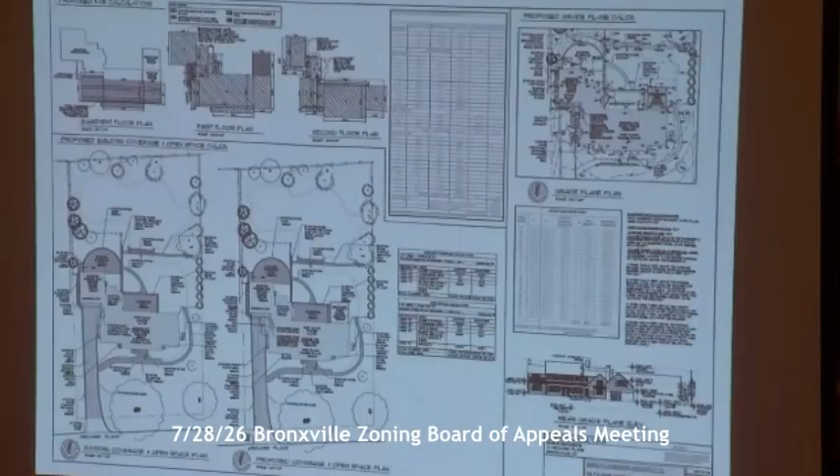the building inspector of the Village of Bronxville dated June 1st, 2026, and a request for area variances at 12 Orchard Place related to a proposed 1-story addition at the east side yard and a proposed 1-story addition at the west side yard, as well as the expansion of the existing rear yard patio with seat wall and expansion of the existing front yard window well over at this location here.

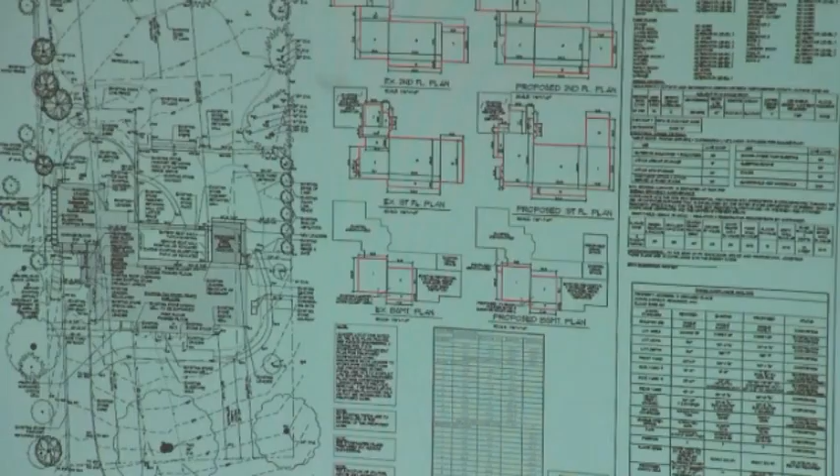The property is also known and designated on the tax assessment map of the Village of Bronxville as Section 16, Block 3, and Lot 25. The property consists of 21,999.7 square feet, 0.5050 acres, and is located on the south side of Orchard Place, adjacent to the intersection with Summit Avenue. It is in the Residence AAA district of the village and is improved with a single-family residence, which is home to owners Kendall and Jack Raybun.

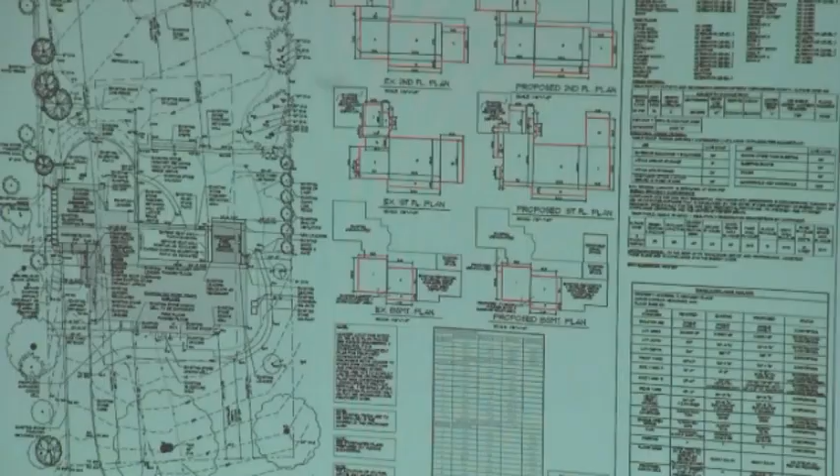Our project proposes in part a 1-story addition at the east side yard that provides a first-floor mudroom off the existing driveway, and a 1-story addition at the west side yard that provides a first-floor bedroom. The new work includes the expansion of the existing rear yard bluestone patio and seat wall, in the area of the proposed bedroom addition, and the repair of the driveway in the area of the mudroom addition, as well as a partial basement renovation, which includes the expansion of an existing window well to provide emergency egress.

So here's that window well here. These proposed improvements require both east and west side yard area variances, as well as a maximum building coverage area variance, as the existing non-conforming status for both of these standards are increased.

Regarding the bedroom addition at the west side yard, the minimum side yard setback is 25 feet. The existing side yard setback is 20 feet, and the proposed side yard to the addition is 20 feet, 3.5 inches. The owners seek an area variance for 4 foot, 8.5 inches.

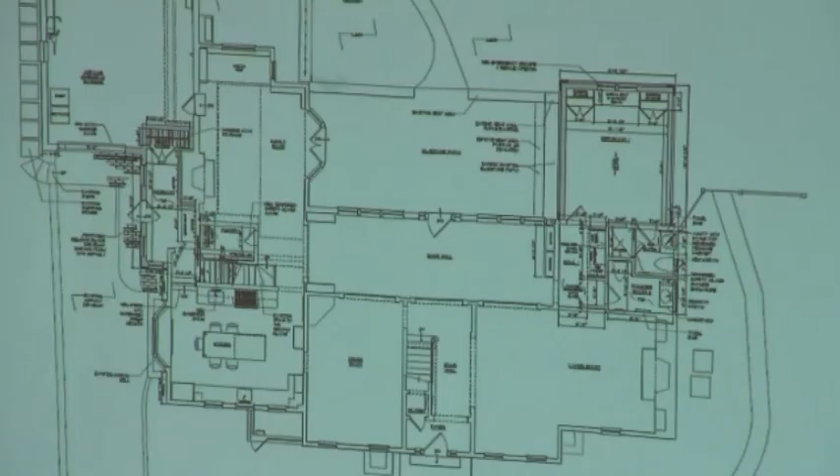Additional work includes the renovation of the first floor to include a new bath, powder room, hall, and pantry closet. At the second floor, a bathroom is renovated and an existing hall bath becomes a laundry room. The owners are working with Hudson Engineering to assist with stormwater plans to address the proposed improvements.

I respectfully request that the board, in making their determination, consider the benefits to the owners as weighed against the detriment to the health, safety, and welfare of the neighborhood and community if the variances are granted.

As to the requested variances, we respectfully submit the following. Number one, the grant of the variances will not produce an undesirable change in the character of the neighborhood, nor a detrimental effect on neighboring properties.

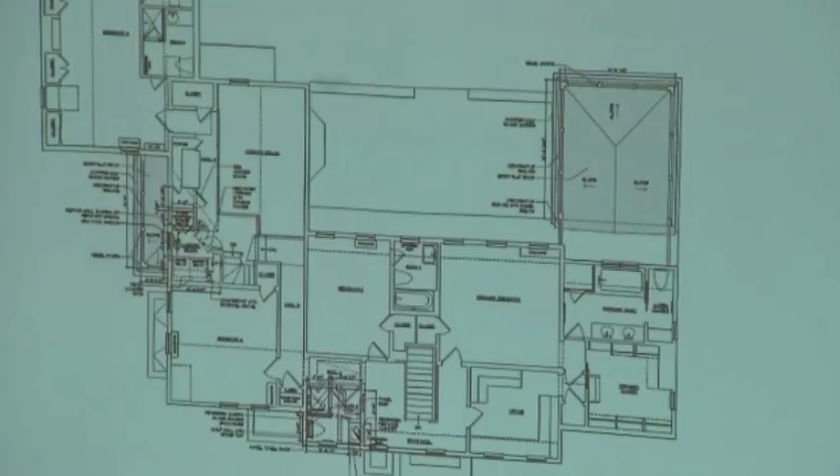May we advance the slide again to the exteriors? It is the owner's intent to create a cohesive architectural exterior with the design and scale of the proposed additions, whereby windows, paneled shutters, and wood siding at the rear of the property all look to match the existing and seek to enhance the center hall colonial.

The positioning of the additions at the side and rear yards—so this is the kind of, once the bay is cut away, this is the view of the side projection. Here's with the bay in front of it from the view. The other addition is behind this portion of the existing structure.

The positioning of the additions at the side and rear yards looks to preserve the home's symmetrical and balanced facade, allowing the existing structure to remain the focal point for the neighborhood.

Number two, the benefit sought by the applicant cannot be achieved by any feasible method other than the requested area variances.

If we go back to the first floor plan, and one more—perfect. Unfortunately, the first floor plan does not lend itself to a straightforward interior alteration that could allow for a mudroom with storage and accessible bedroom and bathroom to provide an alternative to variances. The design seeks to pull inward the proposed additions as much as possible to maintain distance to neighbors while respecting and maintaining the balance of the existing colonial architecture and sufficiently providing for the intended use.

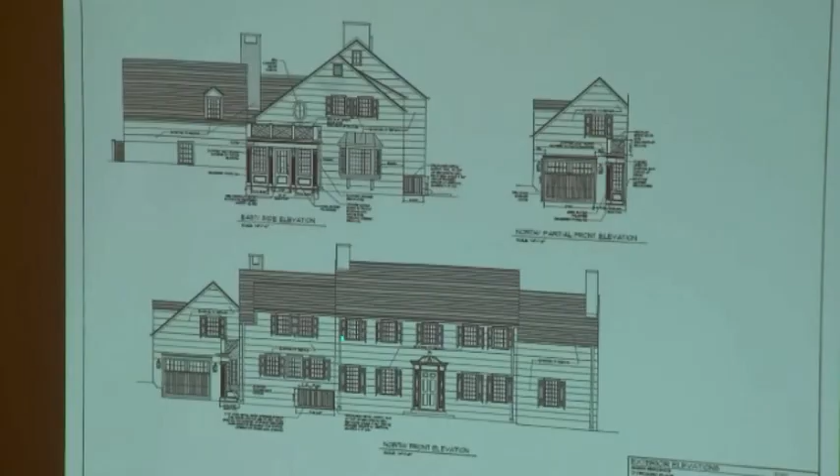If we go forward back to the exteriors, we could see both the front facade, which is kind of all trying to maintain this as the primary focus. And at the back, likewise, if we go one more slide, again trying to maintain building out here with this addition, using the same type of wood siding, window scale, and paneled shutters, allowing the symmetrical exterior to remain.

Number three, the requested variance is not substantial. The proposed area variances are not substantial in that the proposed improvements only increase the existing non-conforming building coverage a total of 355.3 square feet, or 1.6 percent over the existing.

At both the east and west side yards, the proposed additions are sited no closer to the property lines than the existing structure, and look to achieve their intended purposes in a consolidated single-story footprint.

Number four, the requested variance will not have an adverse effect or impact on either the physical or environmental conditions in the neighborhood or district.

The proposed additions work with the existing topography, and the new work engages the opportunity to manage stormwater on site, improving how the property overall controls rainwater and groundwater. The owners are working with Hudson Engineering to provide a stormwater plan, which includes the design of dry wells to store groundwater and rainwater from impervious surfaces.

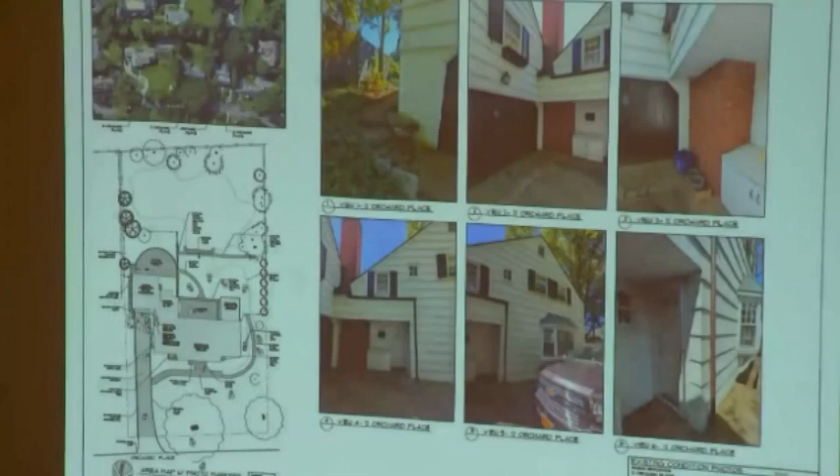Perhaps we could advance to the existing photographs. So we're trying to use this existing recess for part of our footprint and close here, and we're additionally coming out with a flat roof and decorative railing for this mudroom area.

Can I slow you down? Is that where the bedroom is? This is the east side, adjacent to the driveway mudroom. Where's the mudroom?

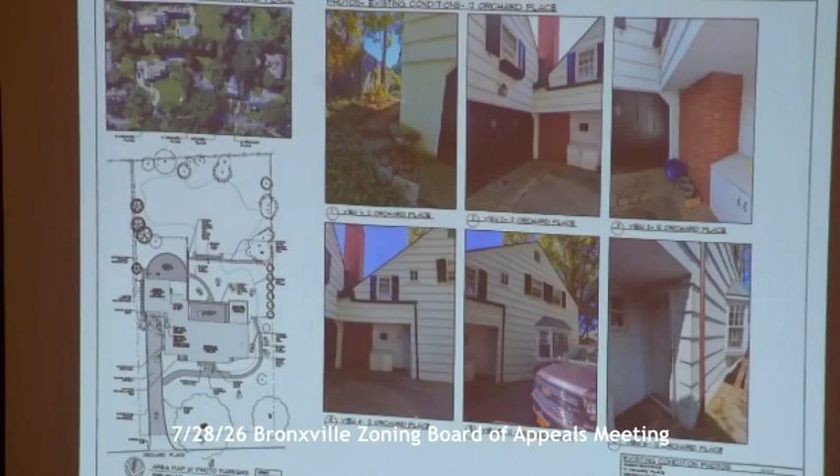Sure, if we go to the next slide, I'm kind of working my way around the site with photos. After backing away down the driveway, here at the bottom you could get a sense of the mudroom addition, what you might experience from the street.

Now I'm coming along the street, looking back towards where our addition is behind this part of the structure. Again, getting closer. Next slide over, one more slide.

Here's the side of the house. The addition is just beyond this fence, and it's an extension. Here, right beyond this fence, I come through, and this is the back of the house. I'm coming out with that bedroom addition here.

This is a view, still kind of rotating around in the same direction. Now looking at the house, that addition's here, and now looking more towards the side yard. Again, here's where it would come out. And this is just a view standing more in that addition location, giving a sense of the expansive backyard.

So it'd be a crawl space underneath the bedroom, not an addition to the... That's right. Okay.

In building the bedroom addition, it's the owner's intent to provide an accessible first floor guest suite for visiting family who have difficulty with stairs.

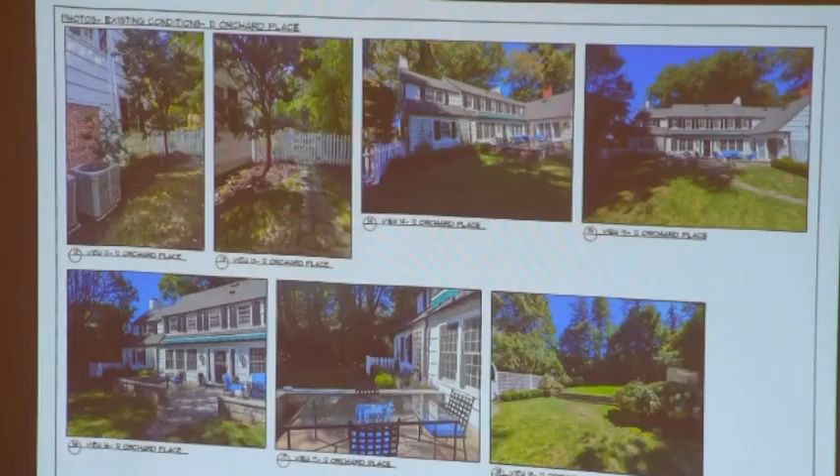I'd like to note that the property is existing non-conforming, which is a non-self-created disadvantage, in that the required lot area is 30,000 square feet and the existing lot area is 21,999.7 square feet. Additionally, the required lot width is 150 feet, and the existing lot width is 110 feet, 4 3/4 inches. These two existing non-conforming property attributes contribute directly to the need for our proposed variances.

So, in conclusion, we respectfully submit that the benefits to the owners outweigh any potential detriment to the community. We appreciate your consideration and request the zoning board grant the requested variances.

So is the office on the second floor now a bedroom, or is that an office? In the front of the house, yeah, that's an office today. So you only have 3 bedrooms on the second floor, is that right?

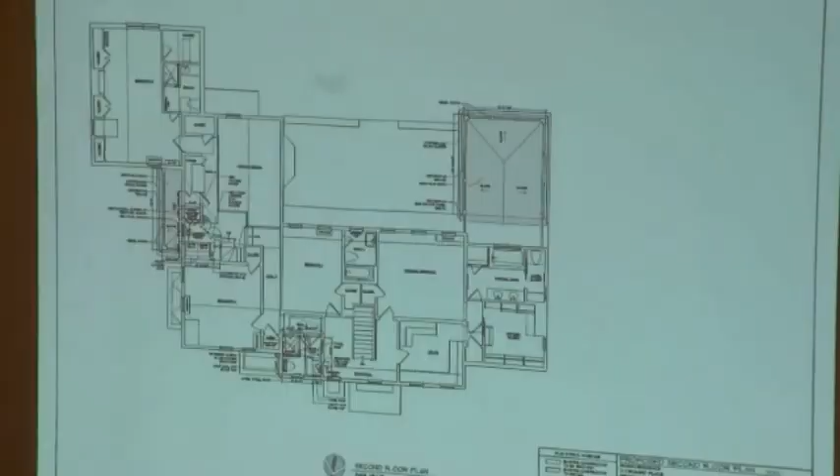I could show you, if we go back to the second floor plan. One more. Okay, here we are. So here's the primary bedroom with bathroom, closet, and an adjoining office. This is the main hall. Here's a bedroom and bathroom. Here's a hall bath, which serves this bedroom.

And then over the garage, we kind of sneak away over, this is a space that looks down to the space below. We're sneaking through over the garage for the bedroom and bath. Is that bedroom an addition? That's not where the garage is? The garage is below this space here. So it is above the garage. Yes. Okay.

And the condensing units are where again? We can see them on the site plan, but there's 2 located right over here, and they're existing, to remain.

Did you receive any letters from number 8? Any support? I don't have any letters from number 8. You didn't receive any correspondence from them? I don't believe we got any, no.

We've spoken to the Keeney family, just adjacent to us. Yeah, we have spoken to them, and Ryan Keeney is supportive of the work we're doing. I've explained what we're doing, given the point you're raising about the majority of the work happening on that west side, and they're aware.

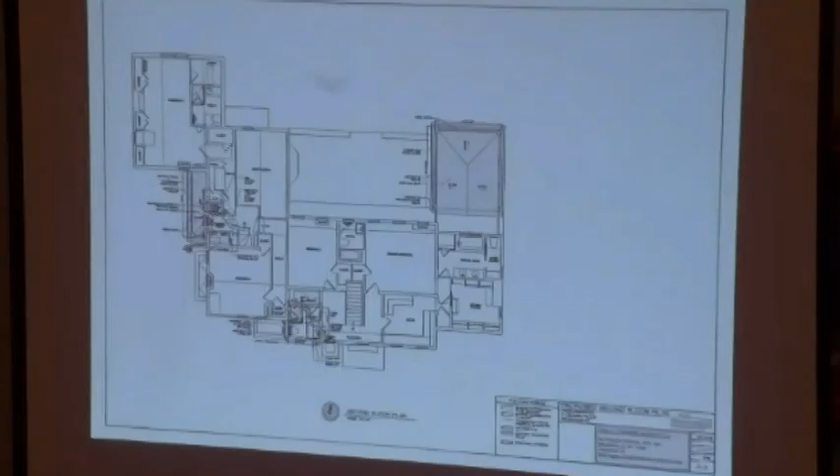Does the mudroom addition prevent you from using the garage, or is the garage still usable, that little bump out? The garage is still usable, however, currently...

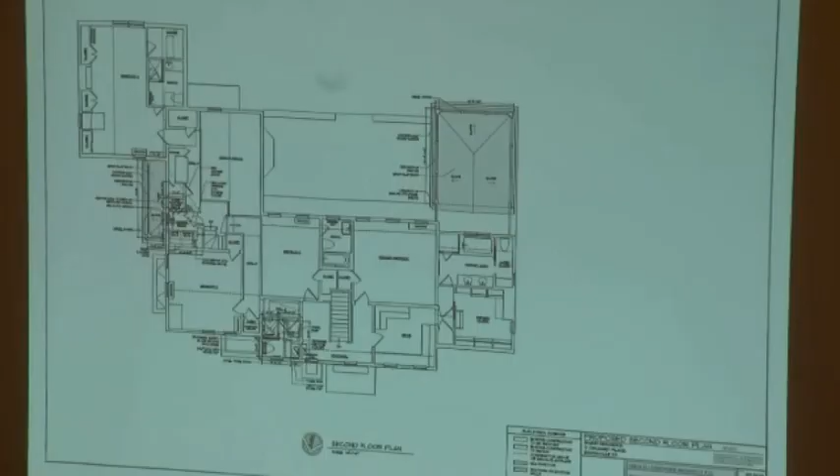So maybe if possible to see the front elevation of the garage. I don't know if we can move forward to the photo slide, perhaps the first photo slide.

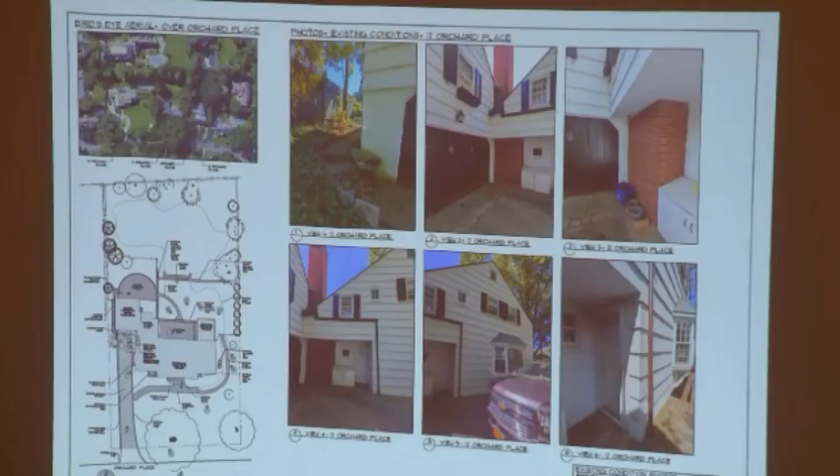It's a little hard to tell. At the front of the house, the composition here is a bit unsymmetrical with these components, the way that the forms come together. The intent is we might be able to see it a little bit on the next slide, as it's going back down the driveway.

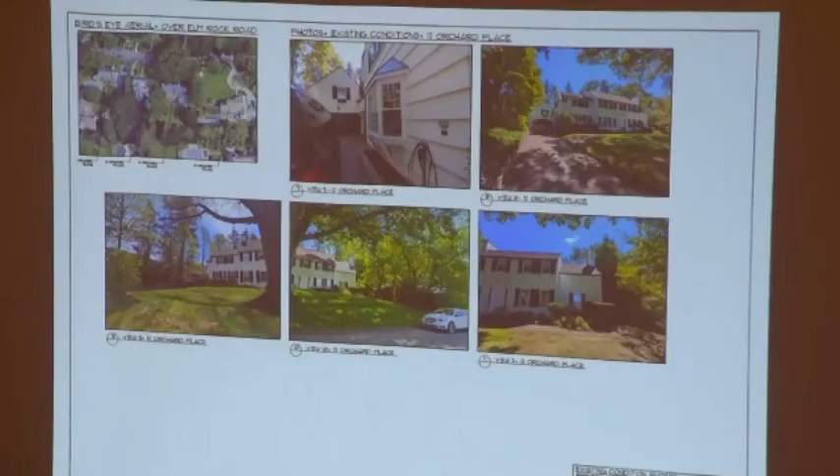With regards to the door, it is getting re-centered over, not like a door and a half. It's no longer going to be where you do like a car and a half wide door. It's a single opening that's just shifted over.

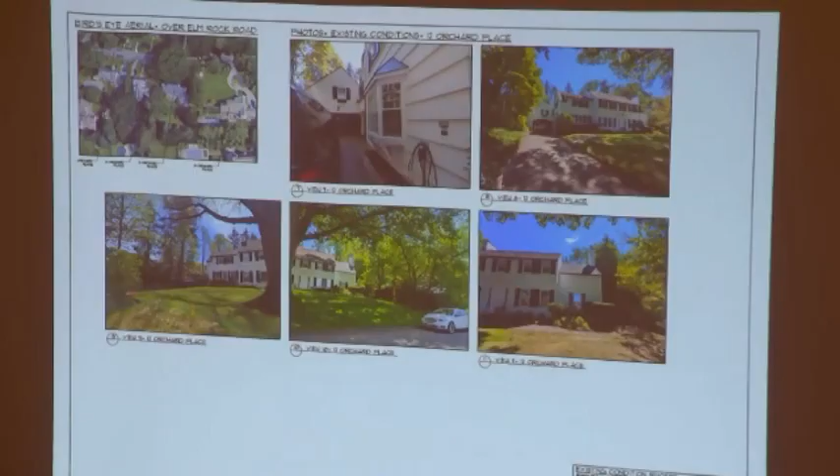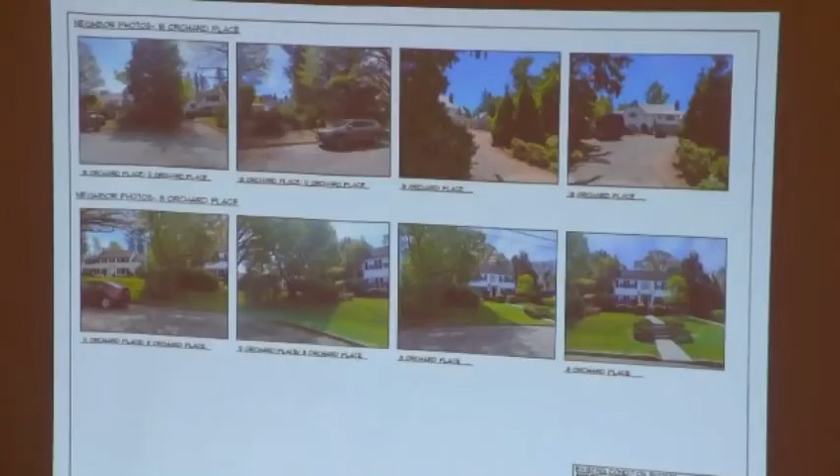And I have kind of a cutaway if we want to see that, go back to the elevations where we could see what that elevation is proposed to look like. Go back, towards the beginning. And one more.

Oh, yeah, here is what you would see. This is what you'd see from the street because this kitchen bay is in front of the addition. And here's what it looks like if you're standing at the driveway.

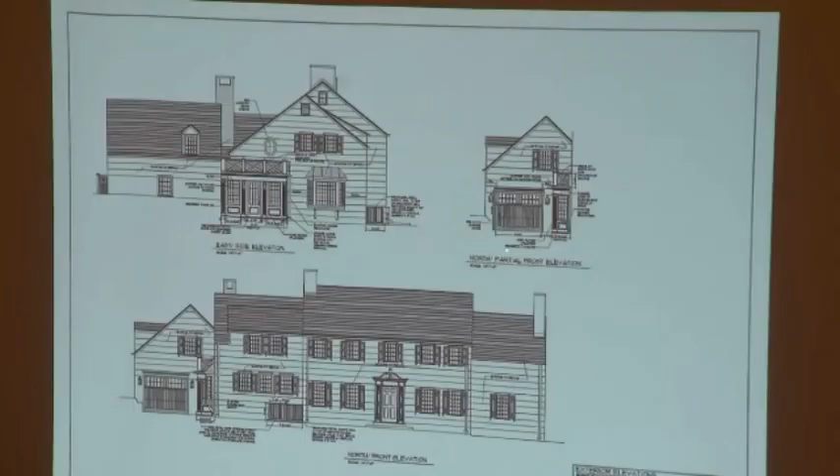Let me just ask if there's anyone in the public that has any questions or comments. Raise their hand. My committee members, any other questions? I don't have any. All good?

Okay, so let me propose a resolution that the Zoning Board of Appeals grant to the residents of 12 Orchard Place the following variances. Section 310-810D: the proposed bedroom addition at the west side increases an existing non-conforming condition. Minimum side yard setback is 25 feet, existing side yard is 20 feet, and the proposed side yard to the addition is 20 feet, 3.5 inches. An area variance is sought for 4 feet, 8 inches.

Section 310-8E: proposed building coverage of 22.5% exceeds maximum allowable of 17.5%. Current coverage is existing non-conforming at 20.9%. A variance is sought for building coverage that is 5% over the maximum allowable and 1.6% over the existing.

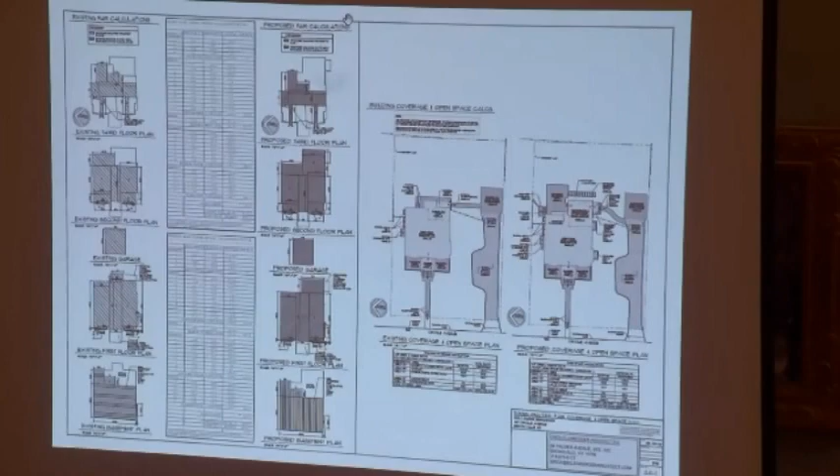The property is designated on the tax assessment map of the Village of Bronxville as Section 17, Block 3, Lot 20. It consists of 14,850.5 square feet, or 0.3409 acres, located on the east side of Oriole Avenue, midway between Tanglewild Avenue and Woodland Avenue. It is in the Residence A district and is improved with a single-family residence, home to owners Christine and Patrick Gallagher.

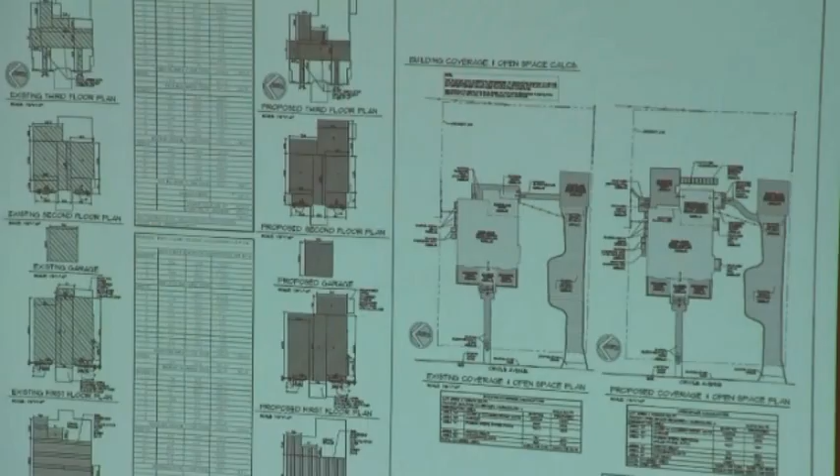If it's possible, just to go one slide forward—sorry, two in the opposite direction—just to go to the site plan. So if we go forward one, the area of work proposes a 2-story addition here.

It's hard to read from this view, but hopefully you can see on the plans there is an existing area with covered porch here, and we are rebuilding this area. Here's the proposed new bluestone patio, retaining wall, landing, stepping stones, and path to the existing driveway and garage.

If we could jump forward to the first floor plan—our project proposes in part the renovation of the first floor. This is very dense here, to provide a new family room, open to the breakfast area, kitchen, powder room, and pantry spaces here and here, as well as a new back hall.

This addition portion includes a new back hall, mudroom, and an open covered entry addition here. At the second floor, we propose the addition and renovation of the primary bedroom suite. Here's a crawl space under the proposed addition, and I'll mention the renovation of the existing recreation room with the proposed window wells.

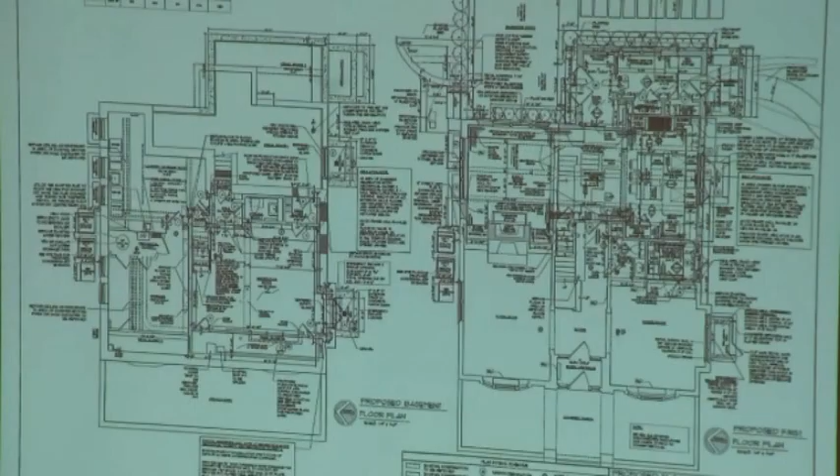Number 1, the grant of the variances will not produce an undesirable change in the character of the neighborhood nor a detrimental effect on the neighboring properties. It is the owner's intent to create a cohesive architectural exterior at the proposed addition, utilizing materials to match the existing stucco, timbering, brick, copper gutters and leaders, and slate roof.

We could move forward one more slide. So here is the addition. Here's the entry—this is the side of the house. Here's the rear of the house, our addition here.

And then a view from the other side yard, we see the dashed-in lines of what was there, or what's beyond. And here's our addition at front.

Existing details at eaves and fascia boards are carried into the new design throughout, with the intent of creating a seamless connection between what is existing and proposed. The area of work, including the patio, is primarily focused on the rear yard, keeping the character of the streetscape intact.

We are proposing 3 new condensing units where 2 older units are currently situated. I have them dashed in over here, using the height specs that the mechanical contractor gave me.

We are proposing 3 new condensing units where 2 older units are currently situated, with the 3rd unit shielded behind evergreens, which serve to hide all 3 units from the street view. Once we progress to the photographs, we'll have some views of those units.

The new equipment will run more efficiently than the existing old equipment and should not have a detrimental impact on neighboring properties. Additionally, part of the project is insulating the existing ceiling and attic space, which should also contribute to having all of the equipment run more efficiently and better.

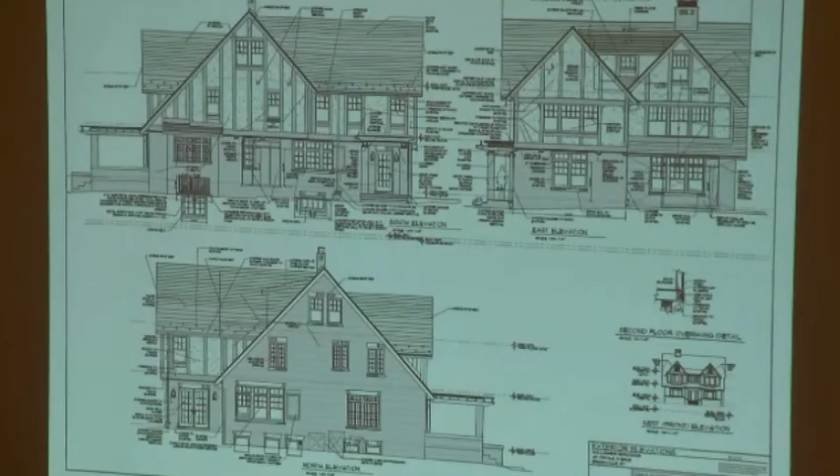Since one of the big moves here is less green space and more patio, could you go into some depth about what exactly the process was for water flow management?

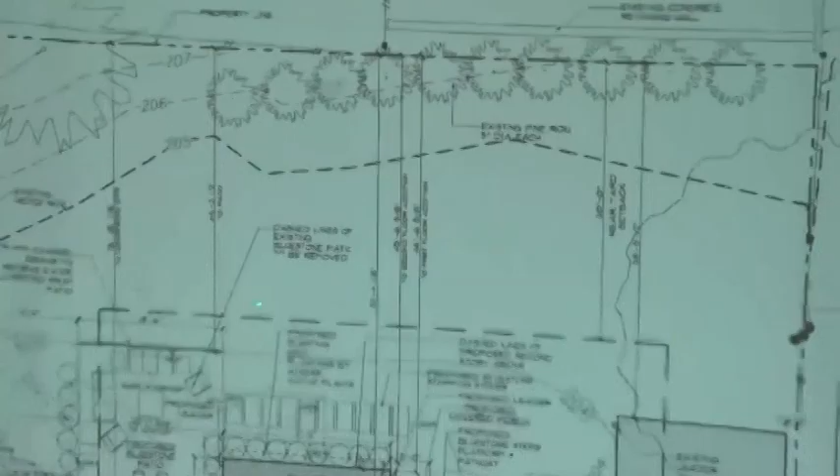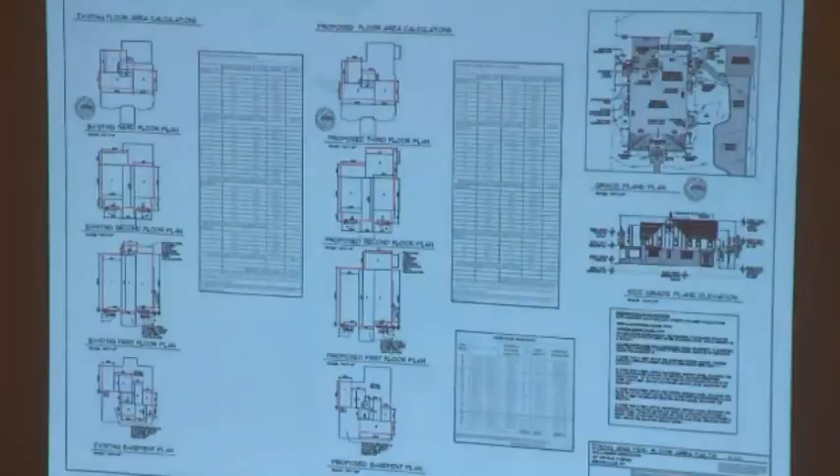Sure, yeah. If we could go back to the site plan, and talk slower. Oh sure, sorry about that. It's all right. If we could go back to the site plan. I don't know if there's any ability to potentially zoom in at all on this area over here, so you could see that. Oh, I think we advanced. Oh, the other direction, sorry. Yeah, right there, okay.

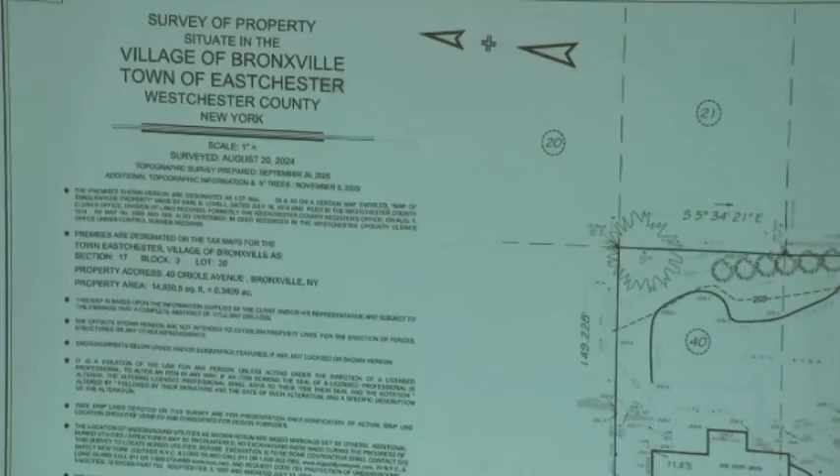So you could, oops. I suppose you could also reference the site plans. We have the pages in front of us. Which page would you like us to? It's sheet S1, and on the left-hand side is the site plan, and you'll see why I'm addressing us on that sheet, you could see where I have the majority of that bluestone space.

It shows the proposed layout and what we're intending to do with furniture, which I think helps bring scale to the proposal. So you'll see we have an area for barbecue grill, outdoor dining, and then some seating. And then we're trying to bring in green against the house. So here's the extent of that bluestone. Here's some green framing our entrance out from this back hall space. And again, we're kind of coming in with green.

By this point here, all of this is lawn and plantings. Our water is pitched out this way and collected with a trench drain, and then all of that water, in addition to, I think I call out...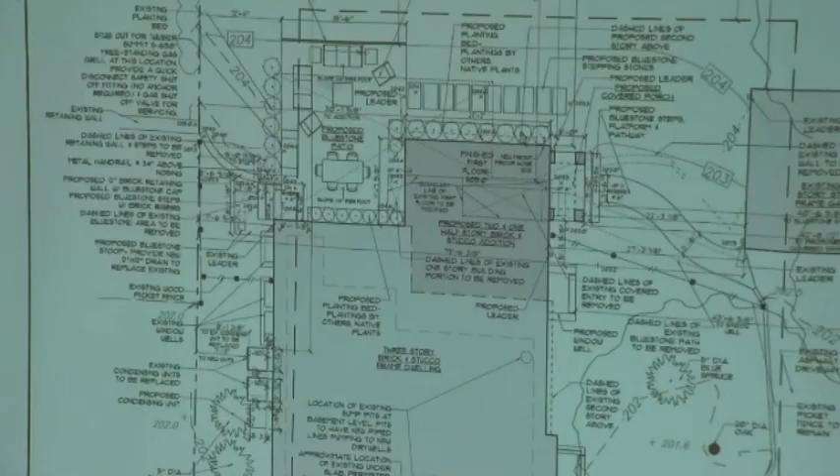That's all of our groundwater. So here I just show, here's one existing sump pump, and there's another one here. And I actually proposed a new one, which is going to handle - we're digging down to have a little more ceiling height, so we'll have all new perforated pipe here with a sump pump, and that's going to be taken to a separate chamber location for the groundwater.

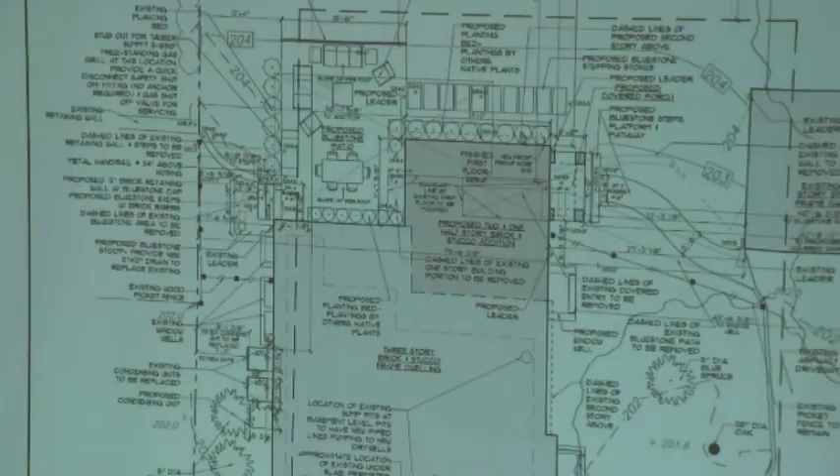On the east side by the driveway, by the east and south, where would the dry well be? I think our topography - we're higher back here and we're lower as we get closer to the street. So we're trying to clear this tree with a pipe chase that would come down and through, and we're having it at the front portion here.

I think so, this is 200, and I think here we're back at 204. So we're seeking to have them where we're working with the natural elevation, so we're not doing a lot of excavation to get the drainage relocated there. We're working with the existing pitch, and we're utilizing this open space here.

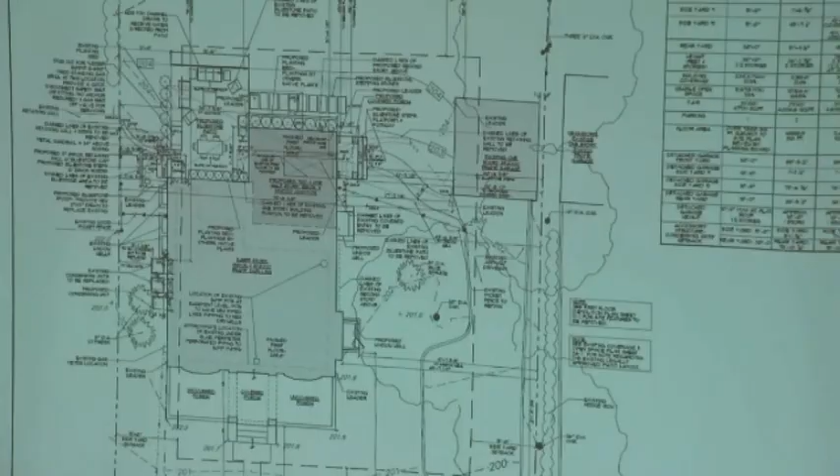So we had an excavation, our percolation test pit, our deep holes were in this area, and those are the numbers that they got from there. And this, all the particular soil conditions are expected to remain particular to this area where they excavated the pit.

The patio that you're building now, is it going more or less in the same spot where it was? It's just getting bigger, is that what it is? So that's a good question, it's a little confusing. I don't know if you visited the site at all, or if you were a little confused with the photos. So prior to the Gallaghers taking ownership of the property, there was a renovation.

The homeowners closed out the permit back in, I don't know, I think it was almost 10 years ago, or in 2007, and the survey that was used for the C of O showed the patio much larger than was in the plans that were approved by the building department.

And I guess there was, trying to track back what's what, I had to use - as far as what is the existing coverage, I had to use what was submitted in the plans back in '06. And so if we go forward one slide. Sorry.

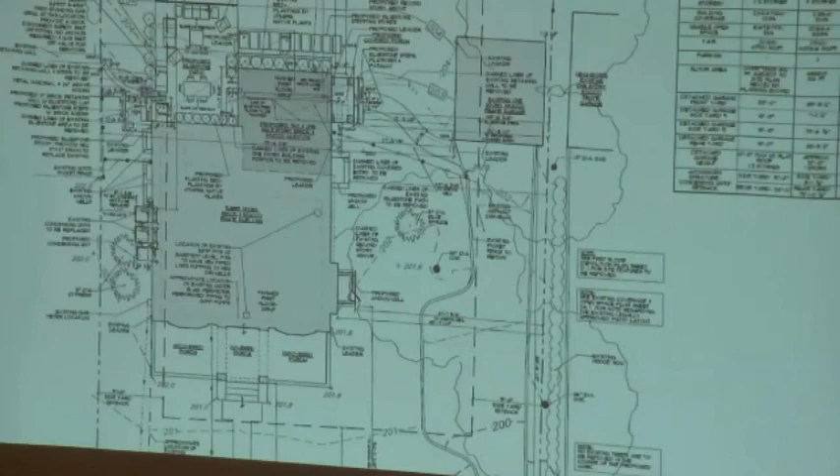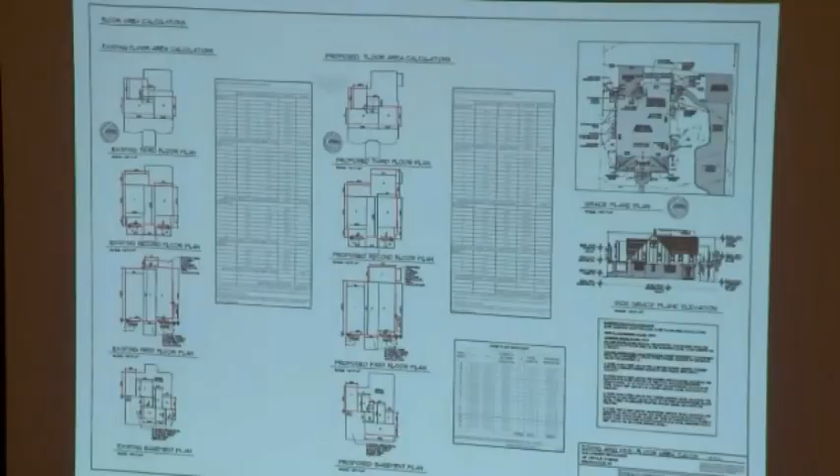Okay, so this is proposed, and you can kind of see the hatching to kind of relate. As far as I could tell from the drawing submitted by the architect in '06, this was on the plans, and again, it's different than the survey when they closed out.

So somewhere there was like a loss of - like there was no update on that patio, but the existing patio now is in fact larger than what we have here and is more in line and similar to what we're proposing as new. We can see that on the pictures that we have.

We've been informed by the building department throughout this process that if there is no approval of this work, the homeowners will have to demolish the existing patio because of the kind of gap in the paperwork. Right, it exceeds, yeah. So in your materials, at one point I saw you were going to build a stationary grill, and then you decided not to?

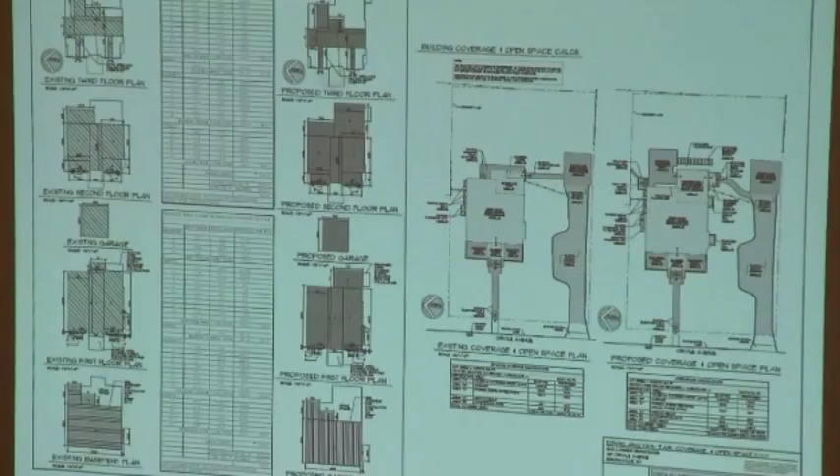Yes. So in the first go around, part of the patio improvements was looking at having a built-in cooking area that would have a stone surface and a built-in grill. One of the comments came back that it was considered a structure outside of the side yard setback. And since having that built-in grill was not a priority for the homeowners, they decided not to move forward with it.

And what we're proposing, or what they intend to do, is use their existing grill, which is a Weber grill.

So what percent of the variance, the total building coverage variance, is the patio? Would you say approximately what percent? Because you mentioned it's quite a large percent. Or to say it differently, what percent is the addition? You could answer that question either way.

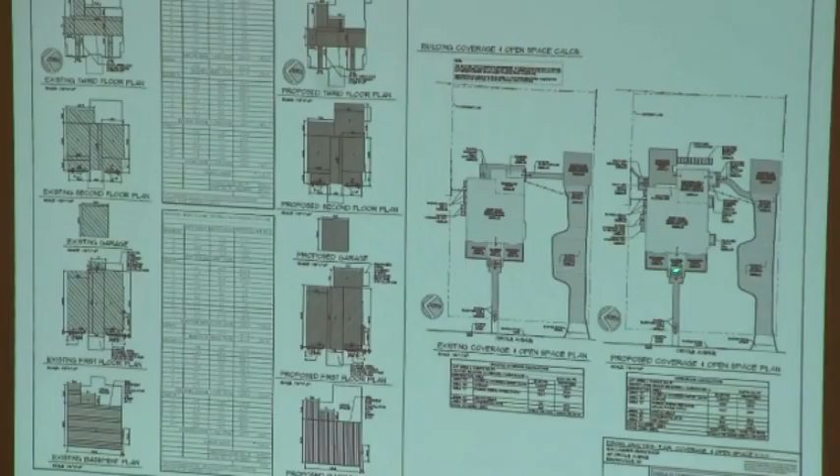So I incrementally increased building coverage. I think I noted it at 1%. The proposed work increases the built structure. I considered the built structure to include the garage, this building, my little open addition here, and a little open-aired but roof-covered existing entry point.

We're increasing that by 1% with the proposed. So even with that number, proposed is 17.1%. Right now all the buildings, meaning the primary structures and the accessory garage, currently are 16.1%. So the difference is that.

There is an existing pathway connecting here now. We're proposing a change in how that meanders. And then we have new window wells proposed. And of course, even the condensing units are part of building coverage. So there's a lot of different portions we're picking up there.

Right, because you're seeking a variance of 450 square feet for building coverage. That is in the request. So it looks like a meaningful amount of this must be the patio, the steps, and so forth, versus the building.

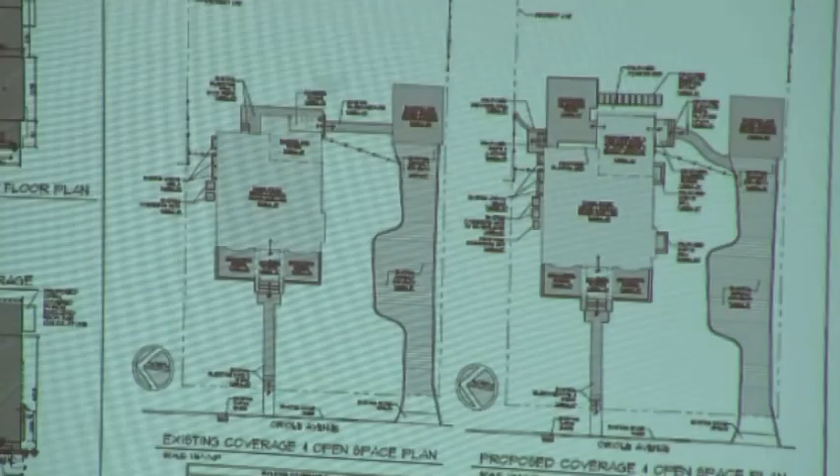Okay, I don't see anyone in the public. Anyone want to raise their hand with any questions or comments back there? No? Nothing?

Okay, committee members? I have no questions. Any more questions? No? Greg, anything from your end? Good. Okay.

So let me propose a resolution that the Zoning Board of Appeals grant to the residents of 40 Oriole the following variances. Number one, section 310-10E. The maximum permitted building coverage is 22.5%. The applicant is proposing building coverage of 25.5%, which will require an area variance of 3%, or approximately 450 square feet.

But it was 25.7. Yes, 25.7, that is correct. Right, 3.2 over. Okay, so there's a discrepancy in this, but let's go with the 25.7 rather than the 25.5.

Number two, section 310-10D2, side yard setback for condensing units. The minimum required side yard is 15 feet. Three new condensing units are situated 7 feet, 11 inches from the side property line, which will require an area variance of 7 feet, 1 inch.